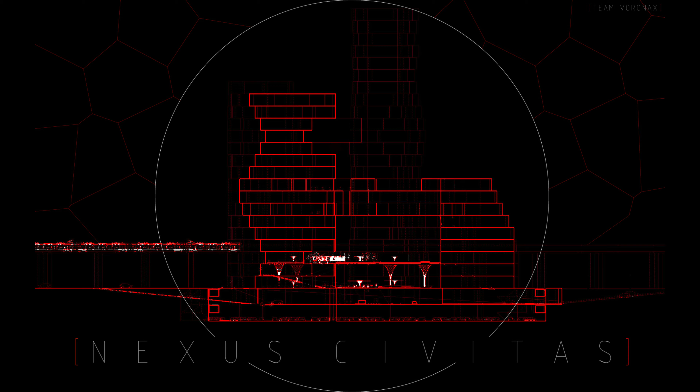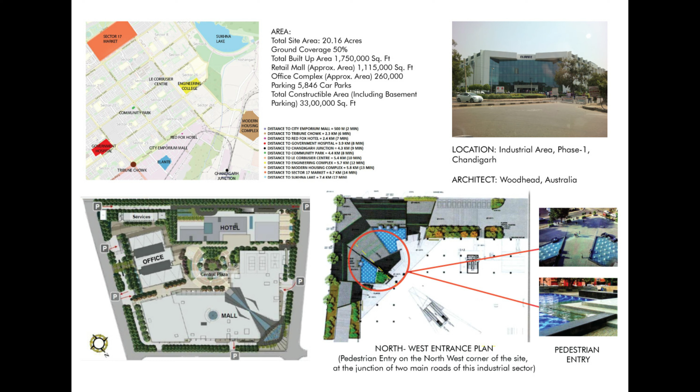To gain an understanding of the multiple programs of a hybrid building, three case studies were done. For retail, Elante Mall, Chandigarh, where hotel, retail, and offices are connected through a central plaza. The pedestrian entry is located at the junction of two main roads, and with accessibility becoming a central concern, outdoor recreational ramps are incorporated.

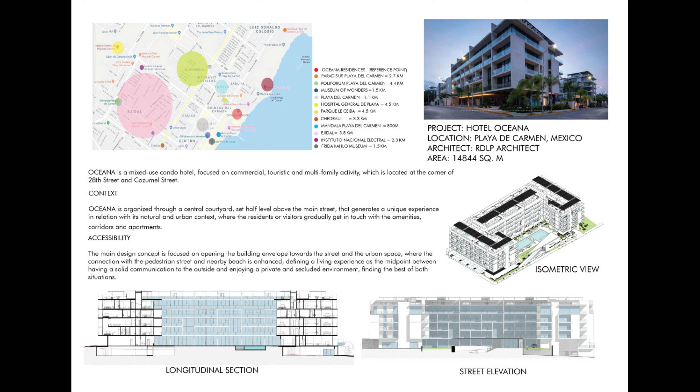For hotel, Hotel Oceana, Mexico. The main concept is focused on opening the building envelope to the street and urbanscape, enhancing the connection to the nearby beach. The dynamic design of the facade allows each apartment to look outwards and have natural ventilation.

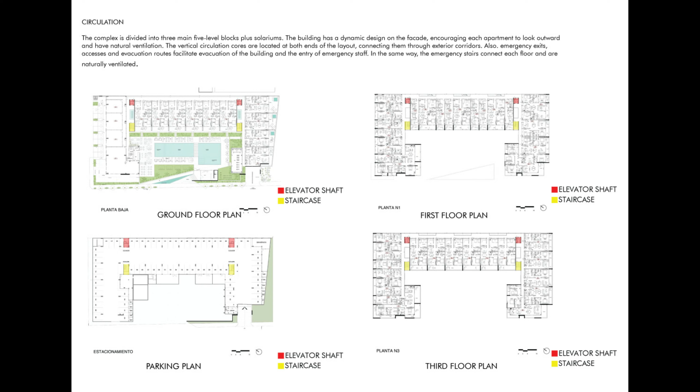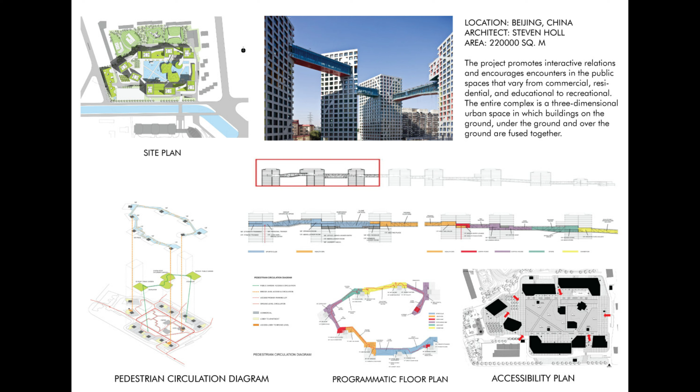Linked Hybrid China, by architect Steven Holl. This project promotes interactive relationship between various functions. All the public functions are on the ground level, and there is a multifunctional series of sky bridges supported by Vierendeel girders connecting all the towers.

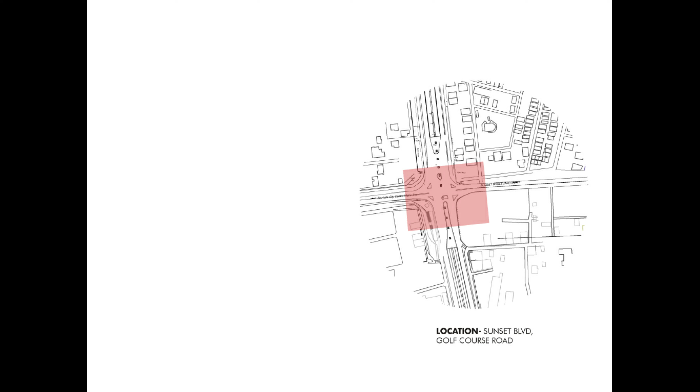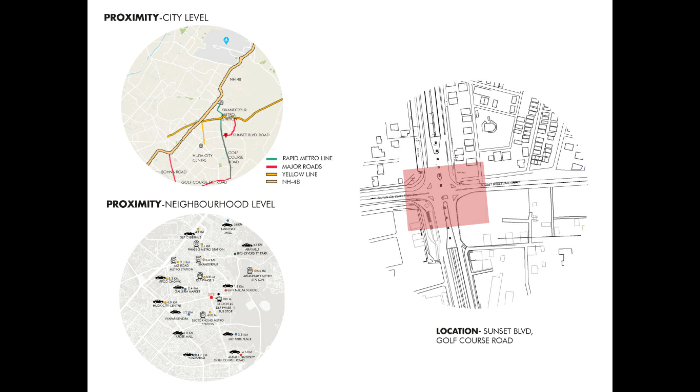Site analysis. Our 3.8-acre site is located at the junction of the Golf Course Road and the Sunset Boulevard Road. We did a city-level proximity study showing the Rapid Metro Line, Yellow Line, and the major roads and highways, and located all the major schools, universities, hospitals, transit nodes, etc. in our neighborhood proximity study.

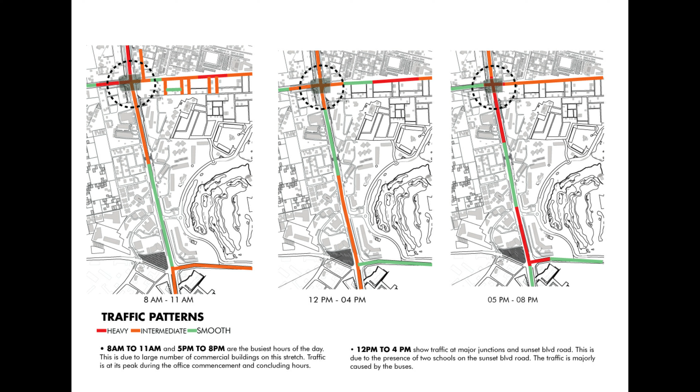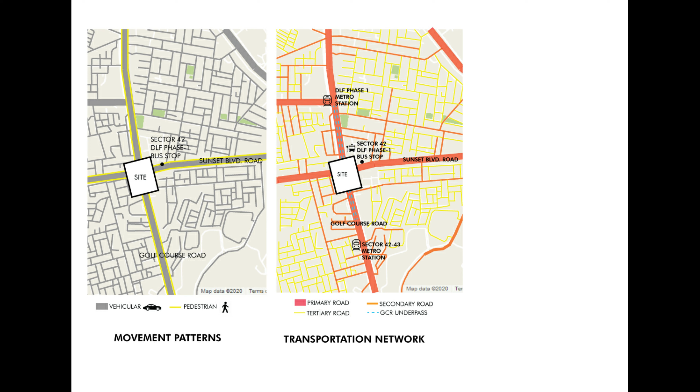Traffic pattern. Our site is located at the junction due to which there is heavy traffic. These plans show the traffic pattern at different times of the day along the major roads. The first plan shows the movement pattern of pedestrians and vehicles. The second shows the transportation network with the primary, secondary, tertiary roads and the GCR underpass. Our site falls in the transitional TOD zones of both DLF Phase 1 metro station and Sector 42-43 metro station.

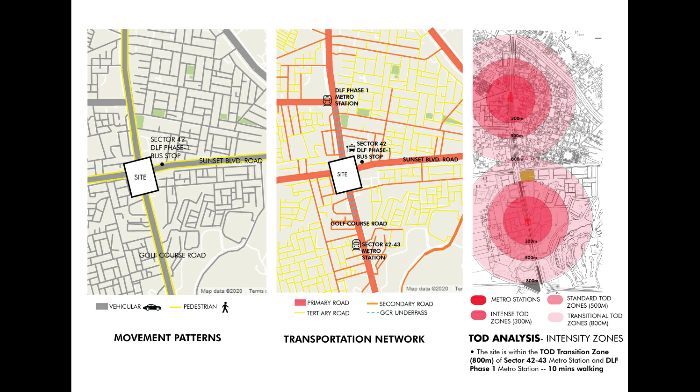The Golf Course Road has a lot of high-rise residential buildings. Along the roadside, there are many institutional and commercial buildings, but as we move away from the road, the majority of them are residential.

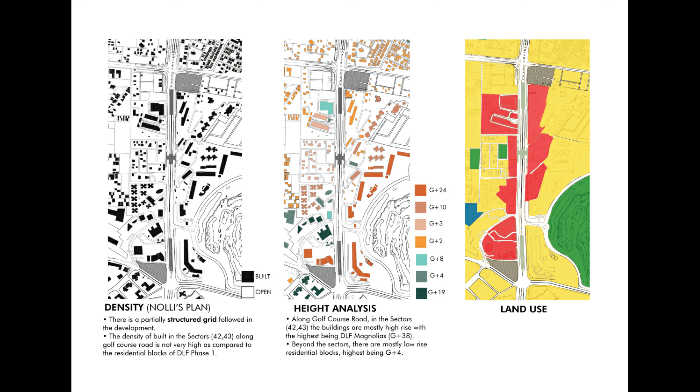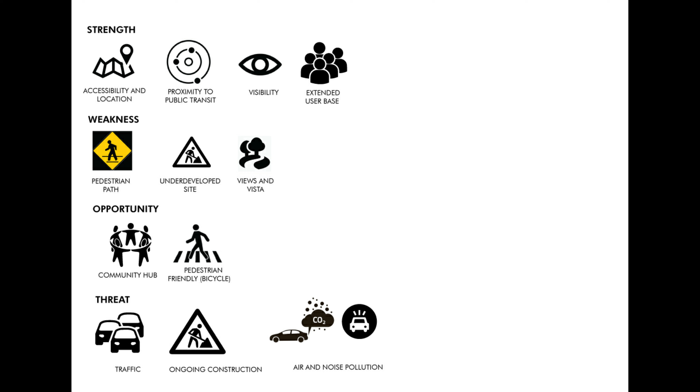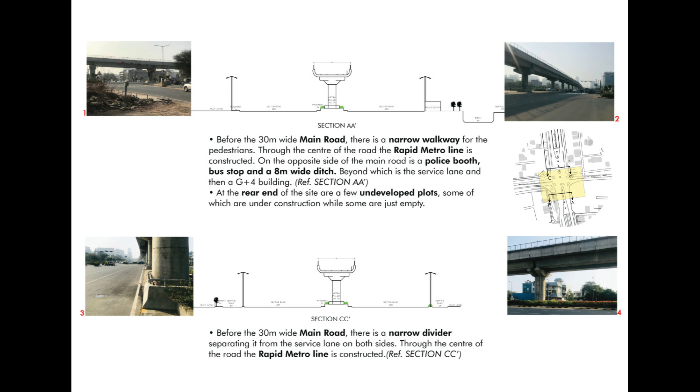Edge conditions. The rapid metro runs along the center of the 30-meter Golf Course Road. On the 15-meter wide Sunset Boulevard Road is the bus stop. This road connects to Gurgaon Faridabad Road, and the connecting road brings traffic from Vyapar Kendra.

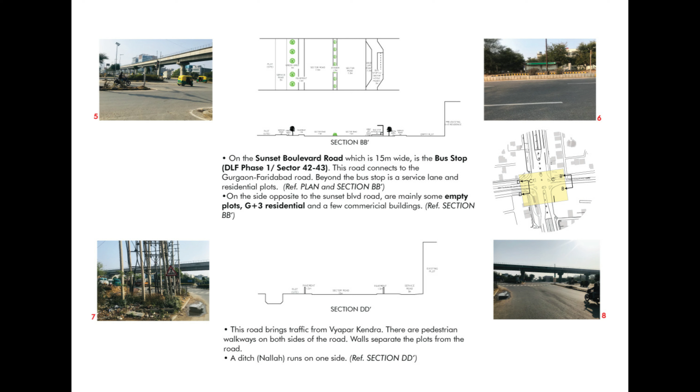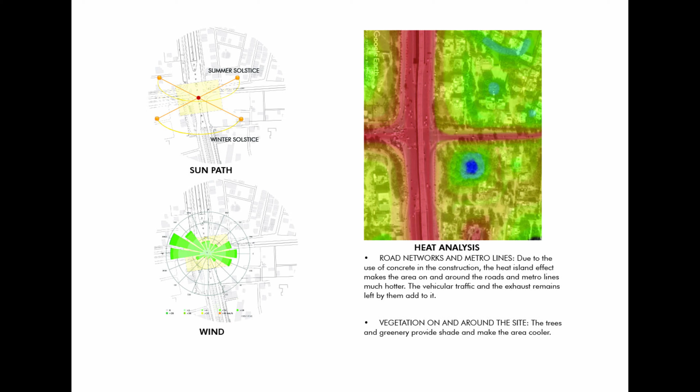Due to the use of concrete, the heat island effect makes the area on and around the roads and metro line much hotter. The trees provide the much needed shade and make the area around them cooler. There is very limited pedestrian accessibility along the Golf Course Road, made even harder by the fast-paced traffic.

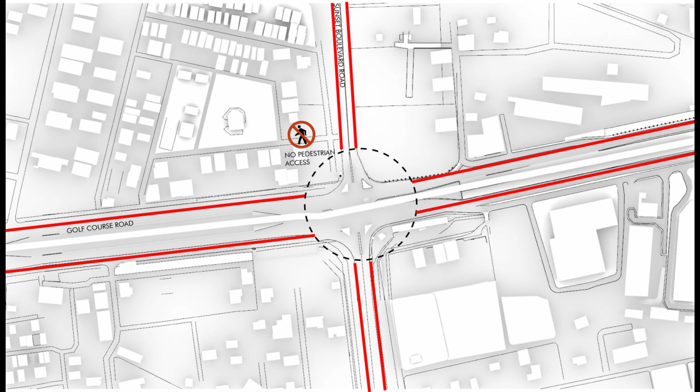Our concept being connectivity, we chose this site to enhance pedestrian access from all four sides of the junction.

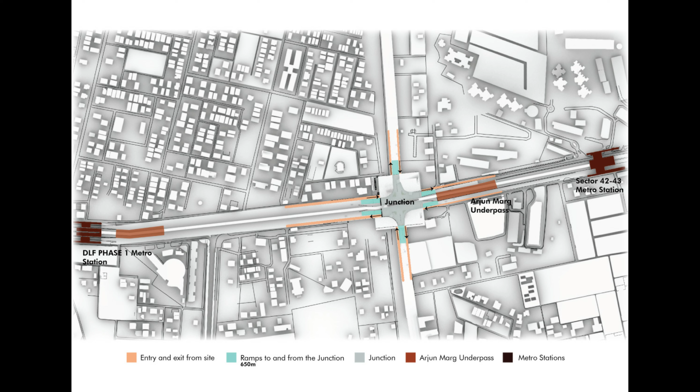Road network. This site has a complex road network due to the presence of an existing underpass and a high-paced junction. Our proposed solution is to sink the junction 6.5 meters, placing the basement below the junction and leaving the junction traffic undisturbed.

Our X Factor is a wellness center. It includes intellectual, social, spiritual wellness along with physical: library for intellectual, gyms, spas and swimming pools for physical, yoga for spiritual, and plazas and open spaces for social wellness.

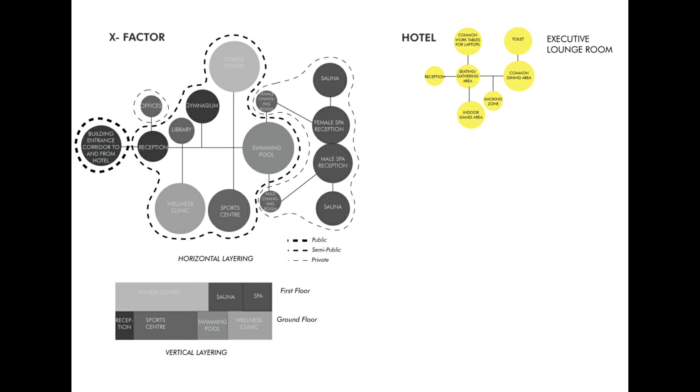Zoning was done to understand the connectivities between programs and functions. To understand the interconnectivities between functions, horizontal layering was done. Vertical stacking was done according to the publicness of the function dictated by the access points.

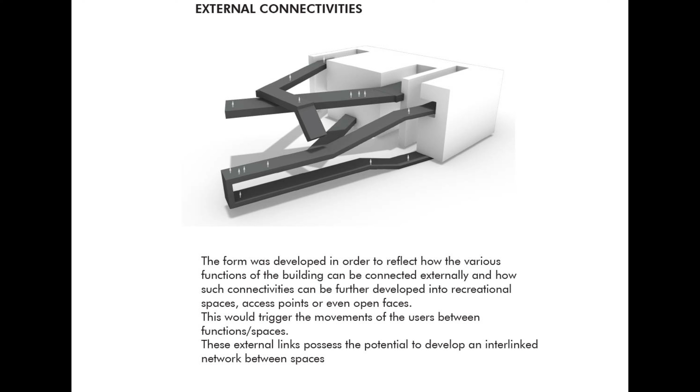Ideation process. Our first main concept is connectivity. The form was developed to reflect how functions of a building can be connected externally to create recreational spaces or access points. The second form was developed according to the junction. The building form was developed by dividing a simple geometric shape to act as a nodal point.

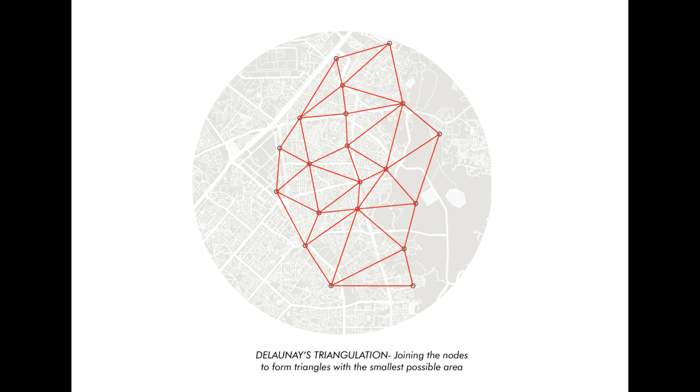Our second concept is Voronoi, which is derived from our proximity studies. The landmarks were used as nodes. Using Delaunay's triangulation, the nodes were connected to form triangles with the smallest possible area. Then the perpendicular bisectors of each side of the triangle were drawn. When the intersection of the bisectors is joined, we get the Voronoi tessellation.

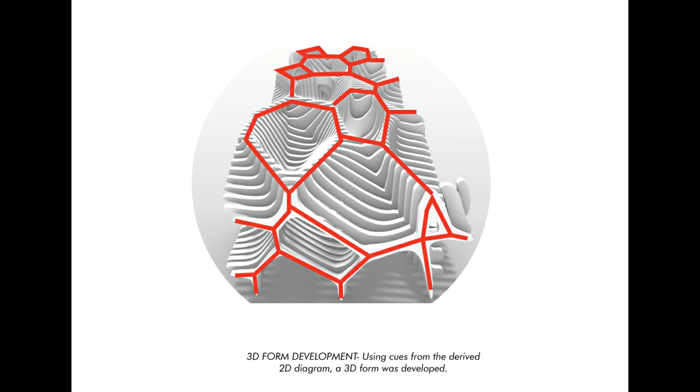Following its cues, a 3D form was developed. We arrived at our conceptual form by combining external connectivities and the Voronoi form.

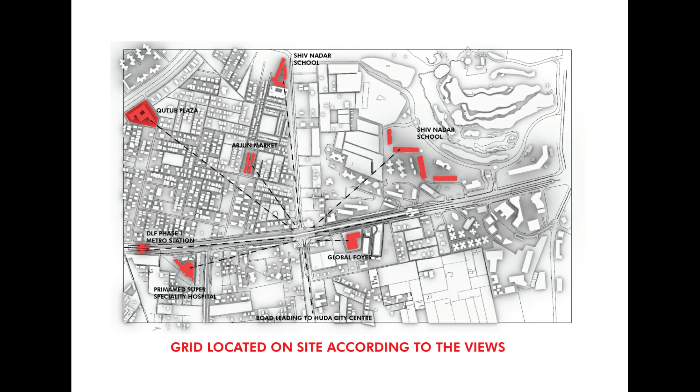We have used a grid developed during proximity studies to generate our form. The grid has been placed on site by aligning to the views of major institutional establishments like SNU Primamed Specialty Hospital and Global Foyer. The grid is then placed on site.

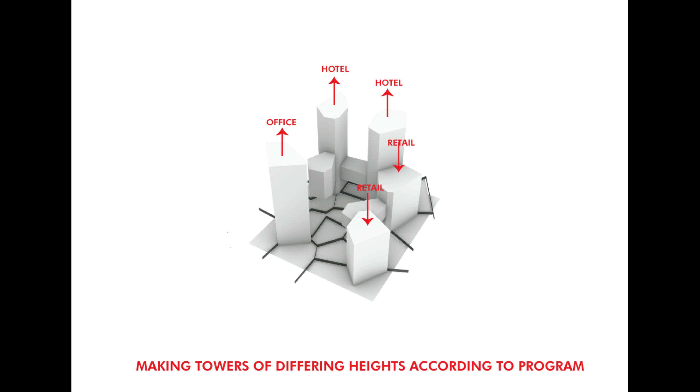Modules are selected so as to mimic the junction below. The heights of the tower are according to the program mix. Terraces and balconies are created to mimic the Voronoi tessellation. The form was then regenerated to resemble the conceptual form. With the addition of external connectivities, we have a final form.

Programmatic hybrid. Overlaps in the different functions were identified. Using connectivities at multiple levels, the programs of retail, offices, service apartments, hotels, and X factors have been linked.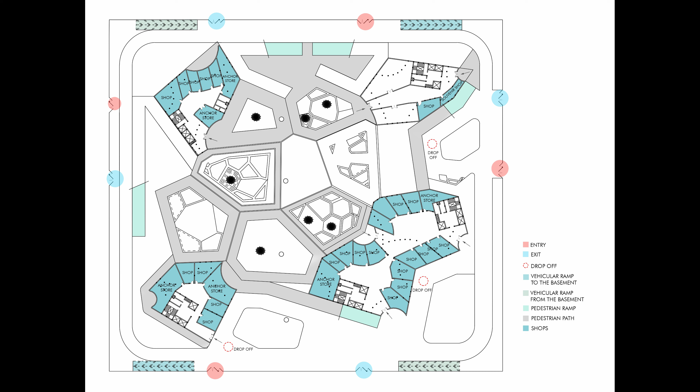Ground floor. The ground floor shows the access to the ramps heading to the second floor landscape. The landscaping is done by using the Voronoi grid to make plazas of different sizes. All towers have public functions on the ground floor, with all except one being retail.

Basement. The basement has the only drop-offs for offices and additional drop-offs for hotel. Second floor. This floor has a perforated landscape connecting all public functions for hotel and retail in the towers.

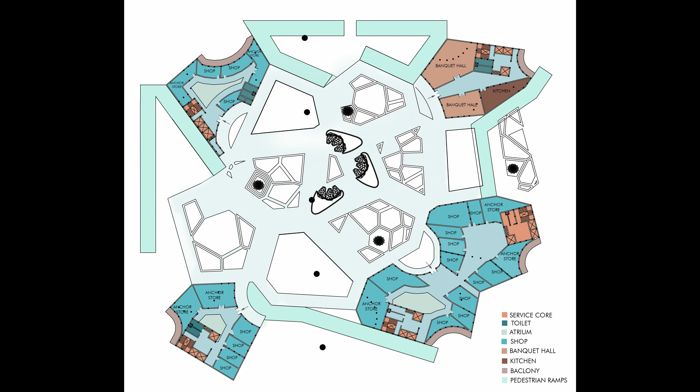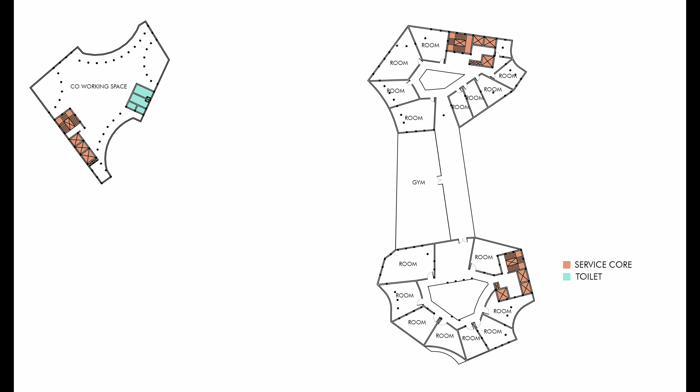Sixth floor. This floor has the first sky bridges linking all the towers. X Factor links hotel and the offices. Eighth floor. This floor has a similar connect and program as the sixth floor. 13th floor. This plan shows the two hotel towers being connected by the sky bridge, also a gym.

Sections. Section AA shows office, retail and hotel tower. We have introduced multiple connectivities due to which the publicness increased throughout the building.

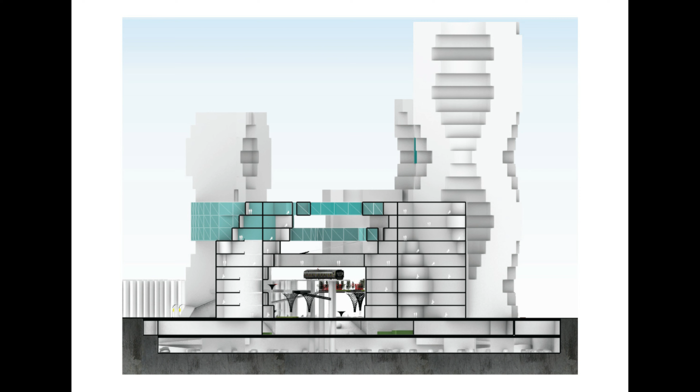Section BB. This section shows the retail and X Factor towers that are linked by the sky bridges and a cantilever floor. Section CC. The main connectivity between the office and X Factor is a double height reading space.

Section DD. The gym in the sky bridge connects the two hotel towers.

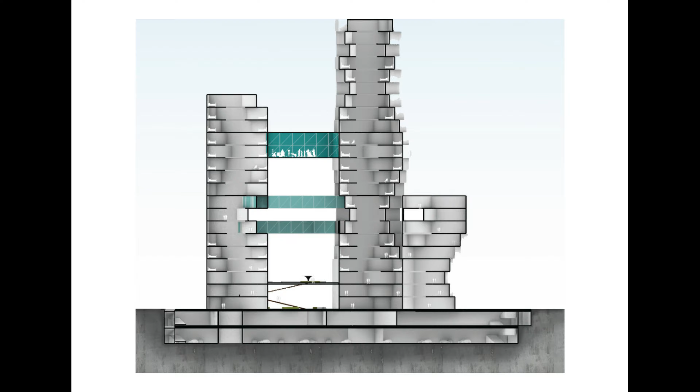Views. Throughout the building there are connectivities every few floors either in the form of sky bridges or plazas or platforms. The Voronoi grid was followed to make plazas of varying sizes.

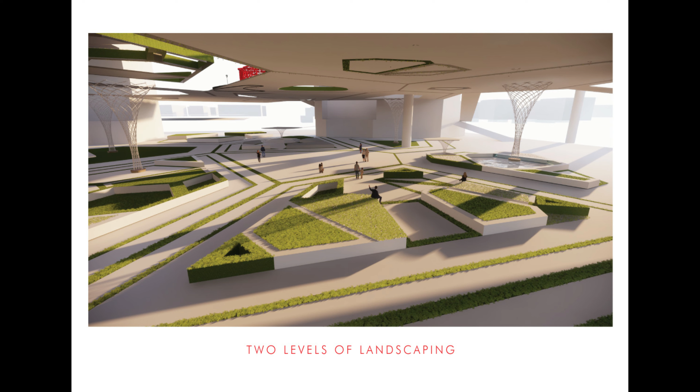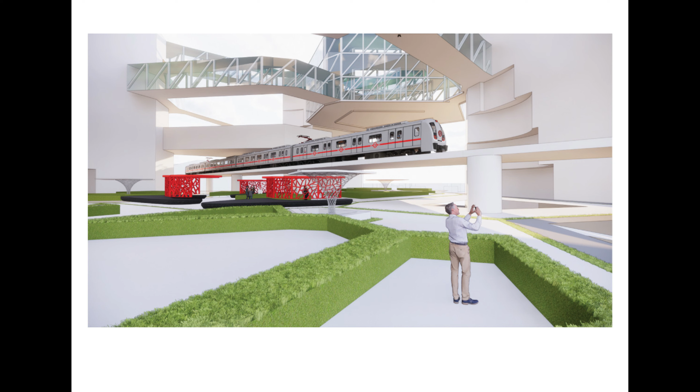Two levels of landscaping: plaza with canopy and seating. Provision of bicycle paths to promote dockless cycling culture already prevalent in Gurgaon. Sky bridges on higher floors link the towers together. Reading area as a connect between office and X Factor.